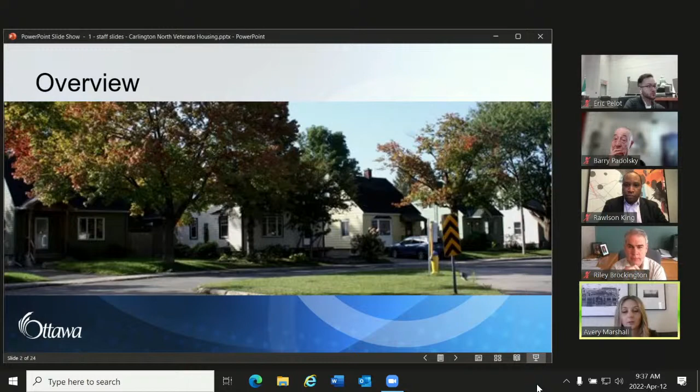Here you'll see the 2 subdivisions marked. The first, in yellow, was 200 rental houses, constructed on Carling Avenue and south of there at Merivale Road. Construction started in 1945, while the war was still ongoing, and continued until early 1946. The subdivision lands were then annexed from Nepean to Ottawa.

Quickly afterward, the second subdivision, shown in purple, was built, another 200 rental homes, as well as W.E. Gowling Public School. They're built immediately south of the first subdivision in a seamless road configuration. The second subdivision began in 1946 and was completed in 1947, and again the lands were annexed to Ottawa.

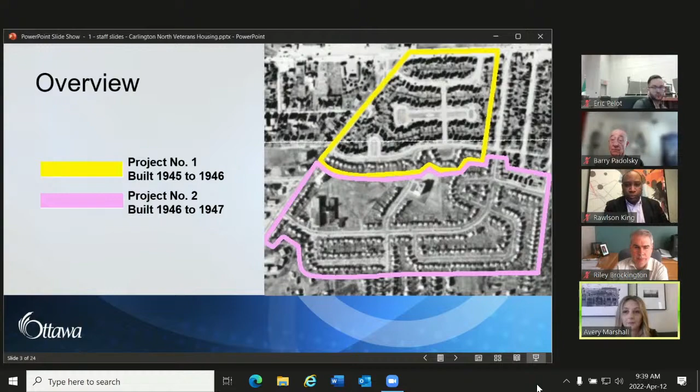The study area bounds are based precisely on those subdivision plan boundaries, for projects 1 and 2. This is the area between Carling, Fisher, General, and Marshall Avenues and Merivale Road on the west. The area is primarily residential, consisting of 440 property parcels.

Breaking them down: 428 residential, 5 open spaces, 3 mixed-use buildings, 2 institutional buildings, 1 place of worship, and 1 commercial building. Of the 428 residential properties, 418 are veterans homes. So 95% of the properties in the study area contain the original veterans houses built by Wartime Housing Limited.

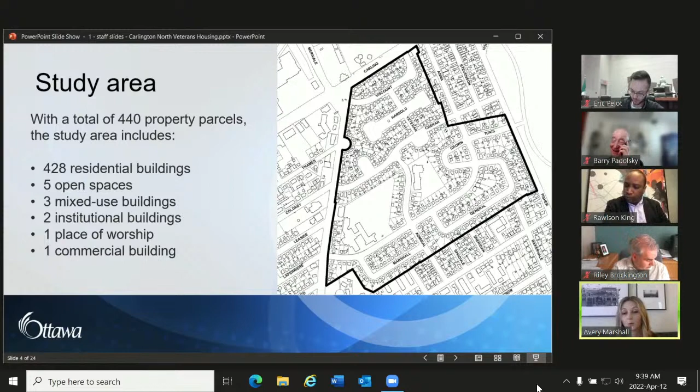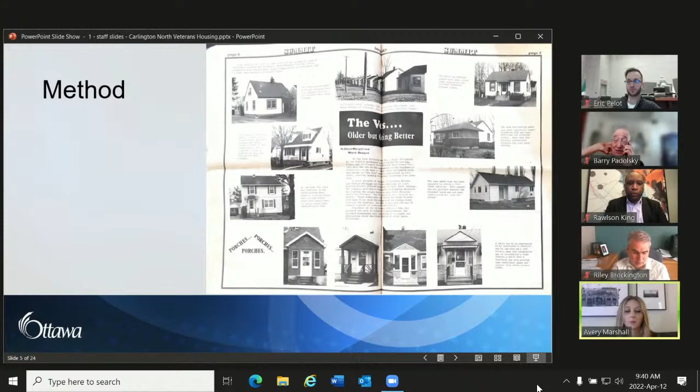The heritage study for Carlington North Veterans Housing was developed to achieve the council direction. The study was undertaken by heritage planning staff in 3 overlapping phases: first, research and documentation; second, community engagement; and third, analysis and evaluation. This method is in keeping with the general model for heritage conservation, to understand the historic place and to manage change.

Our timeline: the study began last summer, 2021, and continued through fall and winter. Our work included an inventory of buildings and streets, historical research at libraries and archives, streetscape analysis, built form analysis, an online survey, an e-newsletter, and several public information sessions and informal meetings.

Towards the end of the study, we started the heritage analysis. As part of that, we looked at each element that makes up the subdivision, as well as the historical associations with each of the subdivision components. This exercise included much more than a review of the individual houses.

Together with historical research and site documentation, the heritage analysis revealed three main elements that define the area's heritage character. First, its pattern of development—how the streets are laid out, notably cul-de-sacs, ellipses, median islands, and very curved streets. It also includes the uniform orientation of the houses towards the street and the continuity of green front lawns.

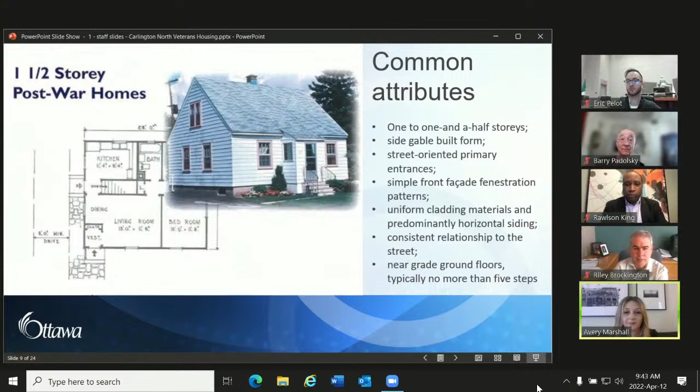The study findings outline that the veterans housing subdivisions have cultural heritage value and a very special heritage character. This character is found in the relationship of the subdivision elements—the roadways, parkland, the buildings, and the open areas. Together, these elements contribute to a distinct sense of place that reflects the identity of the veterans housing subdivisions and the history of veterans housing in Ottawa and in Canada.

The veterans housing subdivisions in Carlington North survive as legacies of the Second World War and as markers in the growth and development of post-war Ottawa. They were built in direct response to the housing crisis of the post-war period, and the subdivisions reflect a coordinated effort from several levels of government and various private sector players at a time of considerable need. They are some of the first subdivisions built in Ottawa after the Second World War, and they represent a defining moment in residential planning in Ottawa and in Canada.

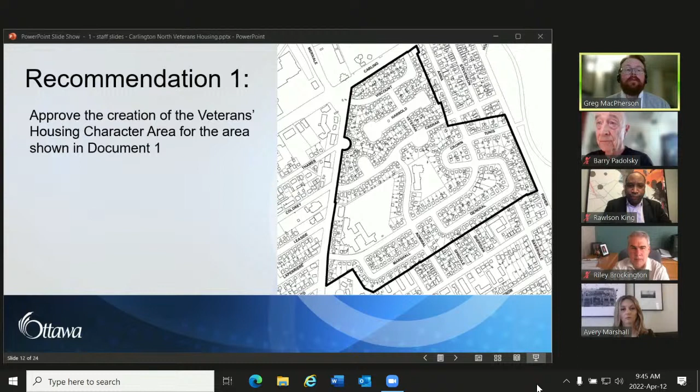Staff recommend identifying the 2 subdivisions as a cultural heritage character area to be known as the Veterans Housing Character Area. A cultural heritage character area is a tool that recognizes and commemorates the collective value of these subdivisions and the contributions of individual houses. Staff reviewed multiple conservation tools enabled under both the OHA and the official plan, and the cultural heritage character area approach was determined to be the most appropriate tool. This is a tool that city staff use in other areas, in particular the Village of Richmond and also within Sandy Hill.

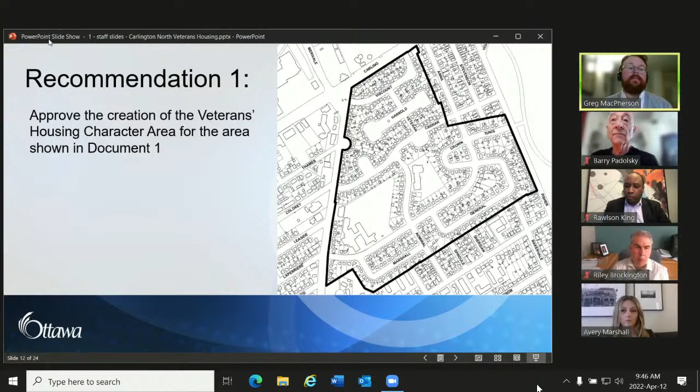Recommendation 2 is to adopt the Veterans Housing Character Area Management Guidelines, contained in section 5 of document 3. The function of these guidelines is to encourage conservation and provide guidance to help manage change within the area. It's important to note that these guidelines are not a heritage conservation district enabled under the Ontario Heritage Act. A heritage character area is implemented under provisions of the official plan, and heritage permits or other permissions are not required by the City of Ottawa within a character area.

The guidelines for the character area focus specifically on areas such as additions, new construction, and landscapes. These proposed guidelines help to balance intensification with cultural heritage conservation, ensuring that owners can retain some of the flexibility to design and build additions to their homes that they currently enjoy.

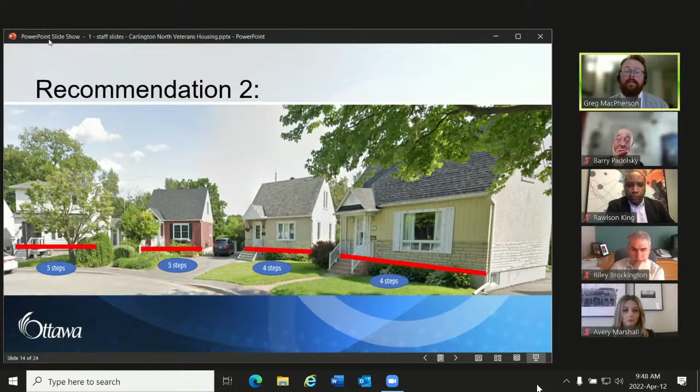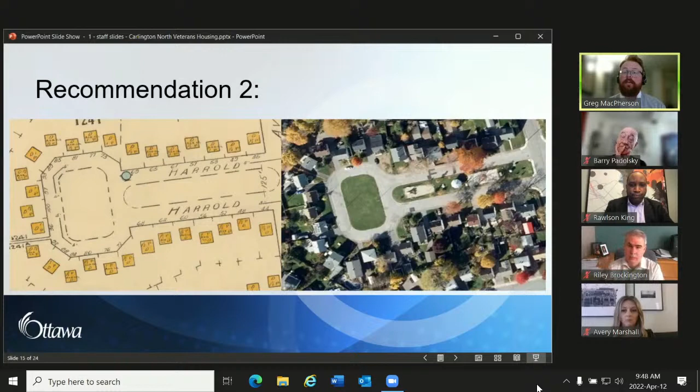This next image speaks to some of the consistency of site layout within the area. Here you can see a current aerial image of Harrold Place and the fire insurance plans for the site's original layout. We have guidelines which speak to new construction being built to approximately the same front yard setback as the lot's original dwelling, or at minimum maintaining the consistency established across those streets. New single detached dwellings are encouraged to reflect the height, scale, and massing of existing dwellings in the character area, and new development should also incorporate green front yards and reflect the property's established spatial relationship with the street.

So recommendation 3 is to direct staff to undertake monitoring for a period of 3 years and to report back to the Built Heritage Subcommittee on the outcomes of the management guidelines associated with the Veterans Housing Character Area. Monitoring may consider things such as built form outcomes, resident perceptions, and staff perception—that is heritage staff, but also our colleagues within planning services and building services.

After the 3-year period, we're intending to report back to Built Heritage Subcommittee on the outcomes of the monitoring period, and the results of this monitoring may lead to further staff recommendations for changes to the character area guidelines or the adoption of new or revised heritage conservation strategies.

So I do want to speak briefly to why we are not recommending an HCD. Staff looked closely at a number of mechanisms, including both heritage conservation districts and cultural heritage character areas. Both of these tools recognize collective value and use guidelines to manage change. Under the Ontario Heritage Act, conservation districts are a very well-known tool.

Historic research revealed to us that the builders and the intentions of these original homes were for them to be altered and grow over time to meet the changing needs of residents, in response to the dramatic housing requirements of the post-war period.

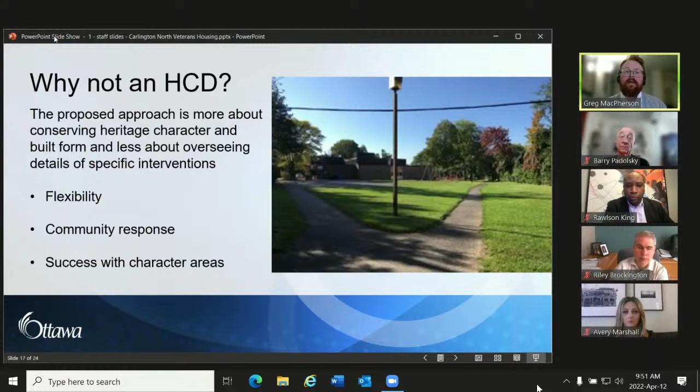This is a tool that's been used in other areas of the city, such as Sandy Hill and also the Village of Richmond. Through its integration within existing planning and development processes, we've seen some success with examples of sensitive infill and compatible alterations to existing buildings.

Recommendation 4 is to direct staff, in consultation with the community and the ward councillor, to coordinate the design and installation of commemorative installations or interpretive signage within the character area.

And finally, recommendation 5 is a 2-part recommendation. This is basically to direct staff to look at 2 properties which were given some consideration throughout the study process. First is to direct staff to evaluate 1 Harrold Place, which is Harrold Place Park, for designation under Part 4 of the Ontario Heritage Act.

Harrold Place Park is a really well-known destination in the veterans housing subdivisions. It was named in memory of Ernest William Harrold, a local man who reported for the Ottawa Citizen in 1913 and went overseas to serve in the First World War. His death coincided with the construction of Veterans Housing Project Number 1, and the park was named in his memory.

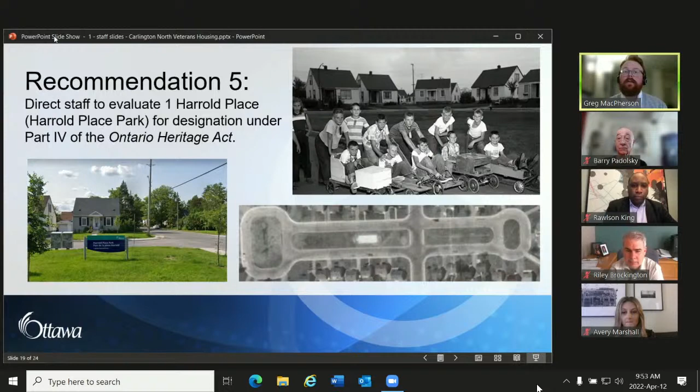The park and the associated street have a very iconic dog bone shape, located right in the heart of the veterans subdivision. It's a very popular gathering place and the site of many community events.

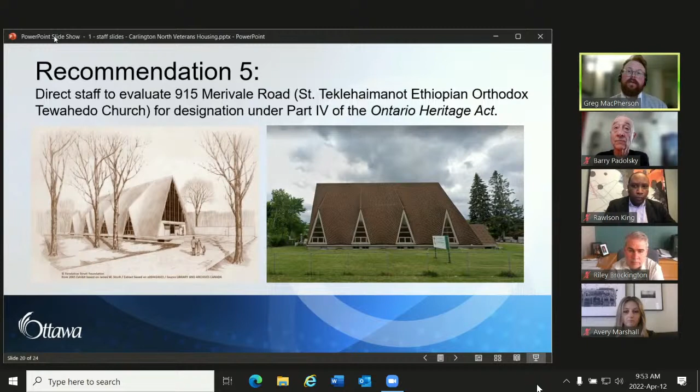The second property is 915 Merivale Road, currently the St. Teklehaimanot Ethiopian Orthodox Tewahedo Church. This church was originally designed by modernist architect James Strutt in 1959 and features a pretty iconic A-frame form. It's a very recognizable building along Merivale Road, and staff identified it as a building worth further consideration for designation through the study process.

And I'm going to pass it back over to Avery, who's going to talk about some of the policy frameworks and notification.

Thank you, Greg. The recommendations in this report are consistent with the Provincial Policy Statement, and they conform to the city's previous Official Plan, our council-approved new Official Plan, as well as the Merivale Road North Community Design Plan, various urban design guidelines, as well as the High Performance Development Standards.

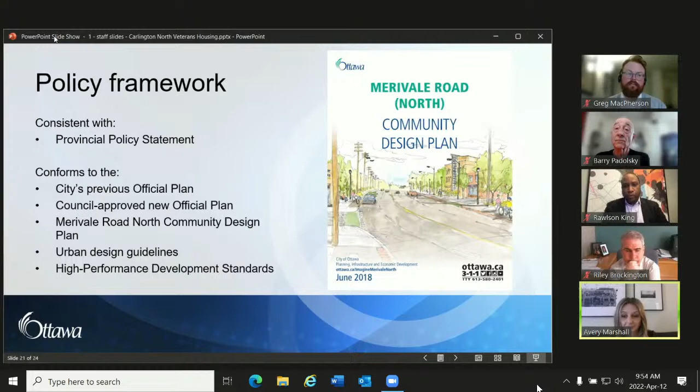In addition to notices mailed out to owners and residents, we also held several public information sessions. We also contacted Heritage Ottawa, the Carlington Community Association, the Strutt Foundation, and the ward councillor, informing them of this report and its recommendations.

So for next steps, the report is anticipated at Planning Committee on April 28th, and then rises to Council for May 11th. If it were to be approved, the guidelines would take immediate effect.

A notice would be mailed to residents and stakeholders, informing them of the character area and its guidelines. Information about the character area and guidelines would then be made available on ottawa.ca and through the project's e-newsletter.

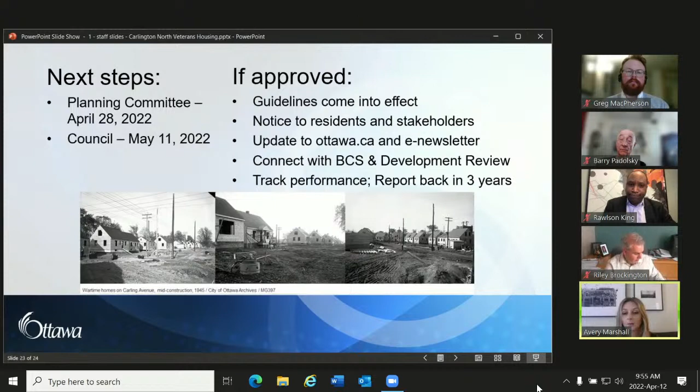Our heritage planning staff would then connect with Building Code Services and Development Review, our colleagues there, and begin to implement the guidelines. Ideally, this would be brought on to projects early, connecting with applicants at that time. Staff would then track the performance of the guidelines and report back in 3 years' time.

Next slide, please. This is our final slide.

In closing, the staff recommend the approval of each of the recommendations in this report. This would achieve the goals of the study. The creation of the Veterans Housing Character Area and the associated commemoration strategy will ensure that the historical significance of the Veterans Housing subdivisions is recognized and remembered. Greg and I would be very happy to answer any questions you may have. Thank you for your consideration today.

Thank you so much, Greg and Avery, for the really in-depth presentation on the heritage study. And I'd also like to acknowledge the work of Emma Donens, the intern who did a tremendous amount of work on this report.

Much appreciated. We did receive correspondence, two letters on this item, one from a resident and one from David Fleming from Heritage Ottawa, both in support. We also have Mr. Fleming listed as a registered speaker. So if Mr. Fleming is available and wants to speak to this item, he will have 5 minutes.

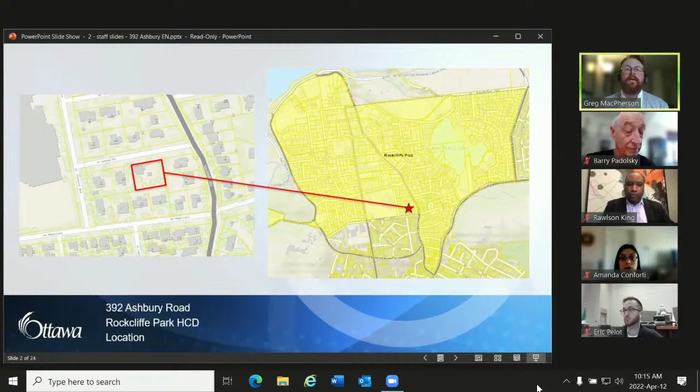So just to give some context, the property is located on the south side of Ashbury Road between Acacia Avenue and Glenwood Avenue, to the east of Ashbury College. Next slide, please.

So here's an aerial image which showcases some more of the current conditions. Again, located about mid-block on Ashbury Road, on the south side between Glenwood and Acacia. Next slide, please.

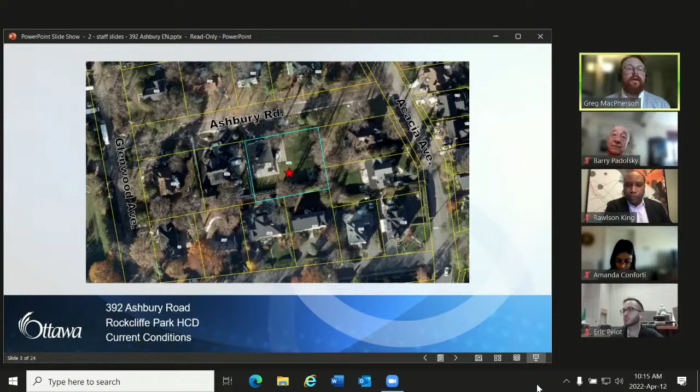So here's a photo that illustrates the existing conditions of the dwelling. This property is identified as a grade 1 property in the Rockcliffe Park Heritage Conservation District, and it's undergone several alterations over the last 10 to 15 years. As you can see in the front, there is currently a fairly prominent semicircular driveway, as well as some mature vegetation and large hedges which surround the property. Next slide, please.

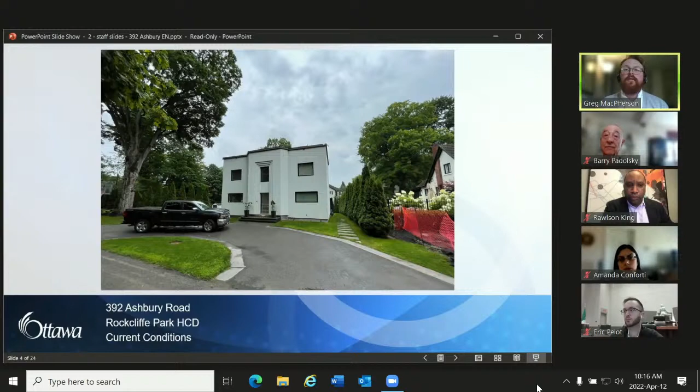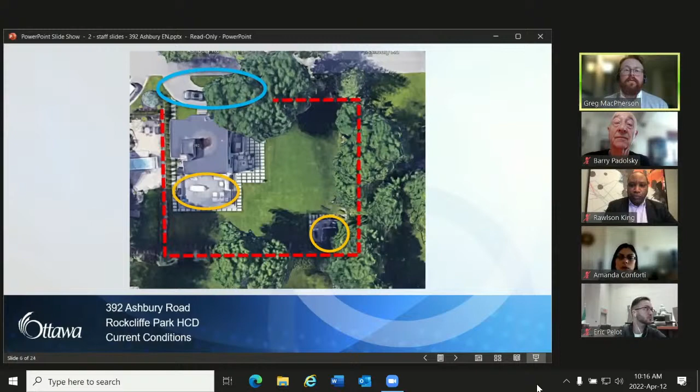Next slide, please. And just to help illustrate some of the existing character, I've highlighted a few of the features of the property. So the red dotted line indicates a low flagstone wall which surrounds the property, and within that there are hedges which also surround the property. These flagstone walls are a fairly characteristic element of Rockcliffe Park. The blue circle highlights the existing semicircular driveway at the front of the property, and the orange circle behind the house highlights an existing rear concrete deck. Next slide, please.

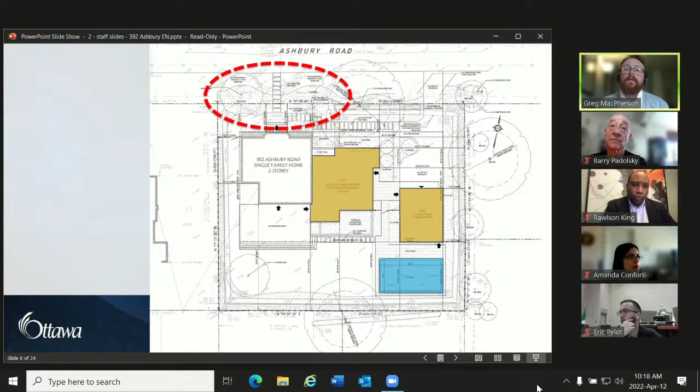So just to highlight further and help illustrate this a little better, I've highlighted some of the different things happening on this property. The yellow areas highlight the new single-story addition and detached garage. The blue highlights the proposed pool in the rear, and the red circle highlights the location of the former semicircular driveway, which is proposed to be removed. As I go through the next few slides, I'm just going to comment on the applicability of the Rockcliffe Park HCD guidelines to this proposal. Next slide, please.

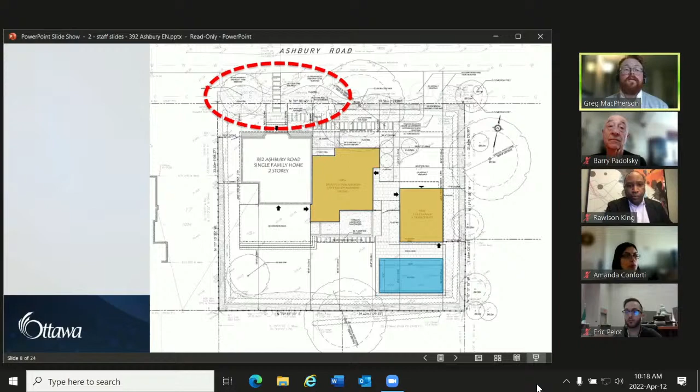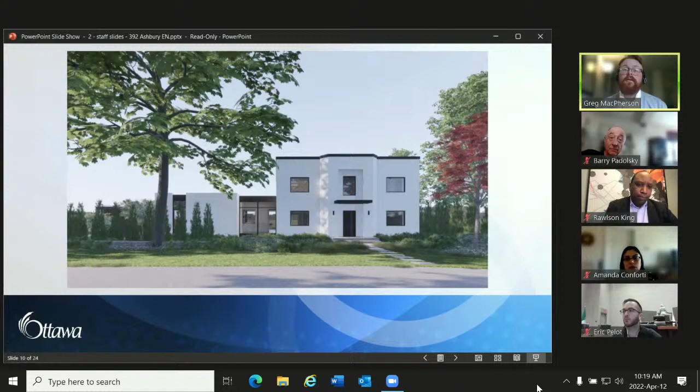This image is a rendering of the proposal as viewed from Ashbury Road. The proposed single-story addition is subordinate to the existing dwelling and clad in a white stucco that matches the dwelling's primary material. In line with the HCD plan, the addition is designed to be contemporary and of its own time, and is set back from the front of the existing dwelling. You can also see the alterations to the landscape, including the removal of the existing semicircular driveway and the reintegration of that front area with the remainder of the streetscape.

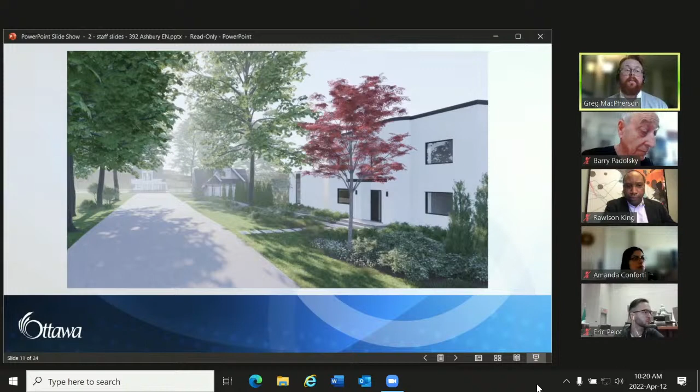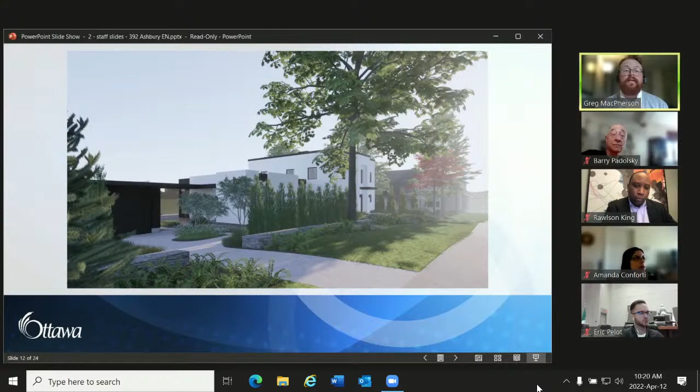This rendering shows the proposed garage. The existing stone wall, which is altered slightly to permit the continuity of the driveway, and the hedges as well as the new planting in the front yard help to screen the new garage. They also help to enhance the streetscape continuity of the property and contribute to maintaining and reflecting the park-like setting of the HCD.

This is another angle from the front, which showcases the relationship between the addition and the garage, as well as some of the landscaping features of the property.

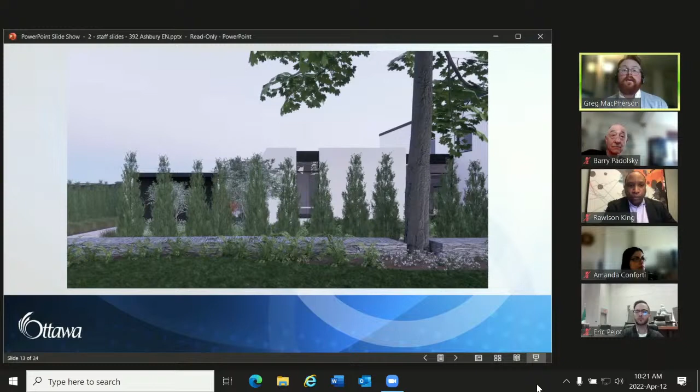Just another angle here. It's important to note that the applicant has made some alterations to the driveway, which help to increase the amount of soft landscaping on the property and also further screen that garage from the streetscape.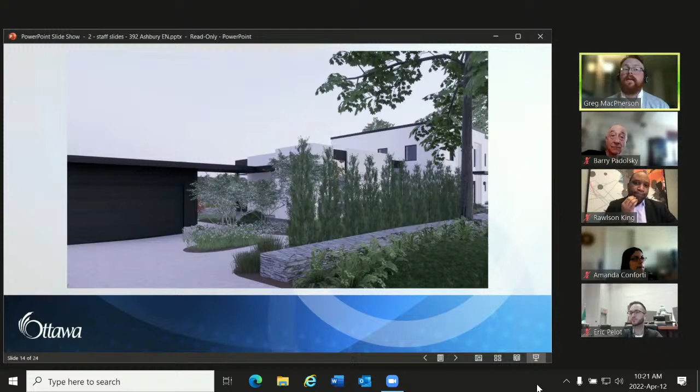Finally, this rendering shows the rear of the property. To the left is the existing concrete deck, which is to be retained, and additional planting contributes to maintaining the green setting for the property. The rear of the new addition is clad in a metal cladding, which is complementary to some of the material featured on the primary dwelling.

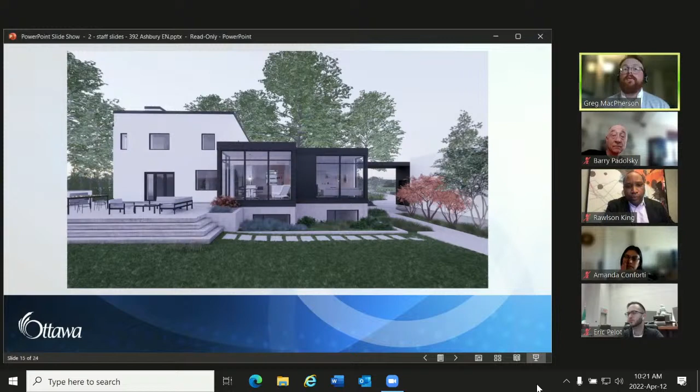To summarize, some of the applicable policies within the Rockcliffe Park HCD plan include the different guidelines for conservation and maintenance, including those related to verandas, porches, and canopies, as there is a small canopy proposed over the central front entrance, which reflects a previous canopy that was once on the building. Section 7.33 covers the various landscape guidelines in the HCD plan. Then 7.41 speaks to alterations and additions to existing buildings, 7.42 covers garages and accessory buildings, and 7.43 covers landscape guidelines for new buildings and additions. A full chart detailing the compliance of the proposal with the HCD plan is included within the report.

Finally, in summation in relation to the HCD guidelines, the addition is complementary and subordinate to the existing dwelling and compatible with adjacent dwellings on Ashbury Road. The landscape alterations enhance the character and visual continuity of the streetscape and conserve features such as the low stone wall and hedges. Alterations and new structures such as the garage are sensitively integrated to maintain the green park-like character of the lot and ensure a dominance of soft landscaping across the property.

Finally, just to reference the standards and guidelines, standards 1 and 11 are applicable here.

In terms of consultations, the Rockcliffe Park Residents Association Heritage Committee was consulted as part of the pre-consultation pilot program. The RPRA Heritage Committee has noted concerns with the amount of new hard landscaping associated with the addition and the garage. Heritage Ottawa was notified of the application. The ward councillor is also aware of the application, and neighbors within 30 meters of the subject property were notified.

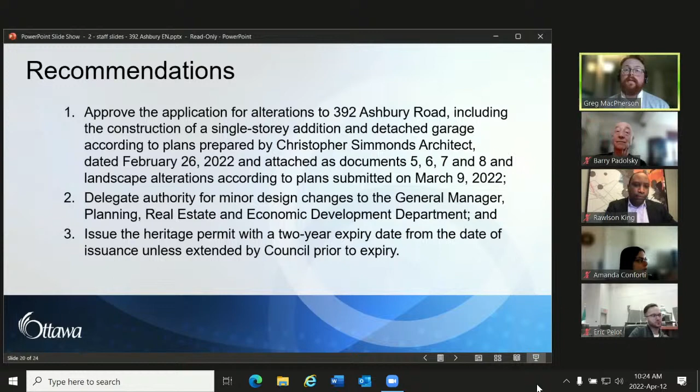That includes my overview of this project. I'm happy to answer any questions from the committee or anybody else.

Thanks very much, Greg, for that in-depth presentation. We did receive 4 pieces of correspondence on this file, providing both comments and one letter that registered some concerns. We have a number of registered speakers, so we'll just proceed here with our registered speakers.

The first registered speaker is Scott Hayward from Simmonds Architect. Good morning, Chair and council members and attendees.

Thanks, Greg, for the presentation. I won't take much of your time. I think Greg did a really good job of encompassing the intent of the design and the features of what we're attempting to do with the site. One area I'll mention is that the elimination of the circular driveway along Ashbury is a crucial element in regaining the landscape quality of the property itself, and that's something we really stressed strongly. The amount of planting will also be increased. So the design, although it does increase the built and hardscaped area, will appear quite sensitive and in keeping with the surrounding environment and streetscape.

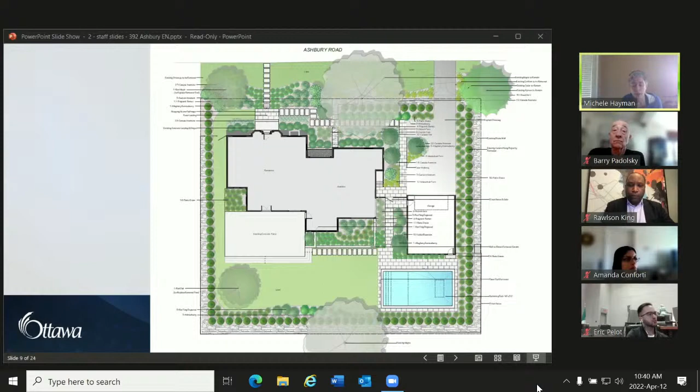There is significant softscape that has been added. However, it doesn't change the amount of hardscape that has been added to this property. It merely softens it. So thank you very much for the opportunity to speak, and I welcome any questions you might have. Thank you.